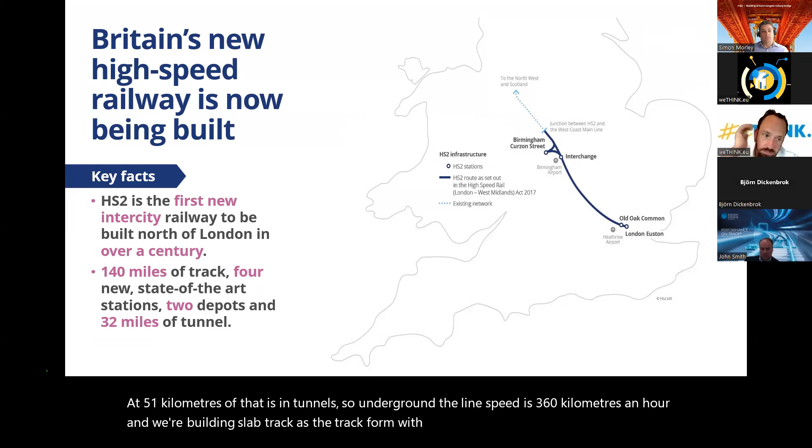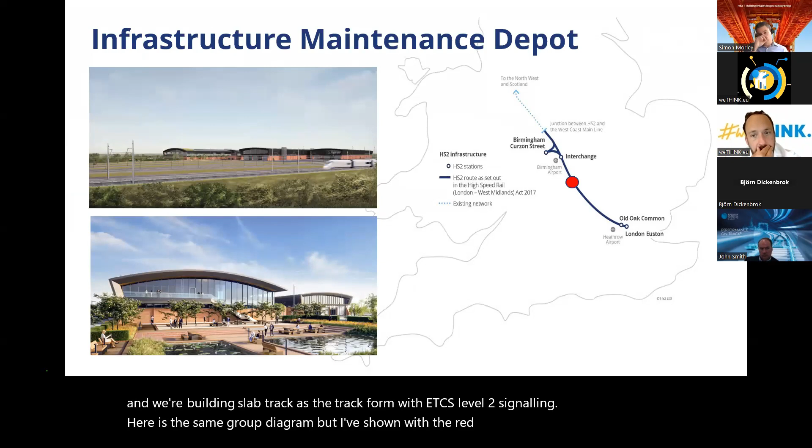Here is the same route diagram, but I've shown with the red dot where our infrastructure maintenance depot is. I've written the requirements for this depot too. The depot is designed and we're waiting for a systems contractor to build it for us. This is halfway along the route, and it's supported by smaller satellite depots to the south and the north.

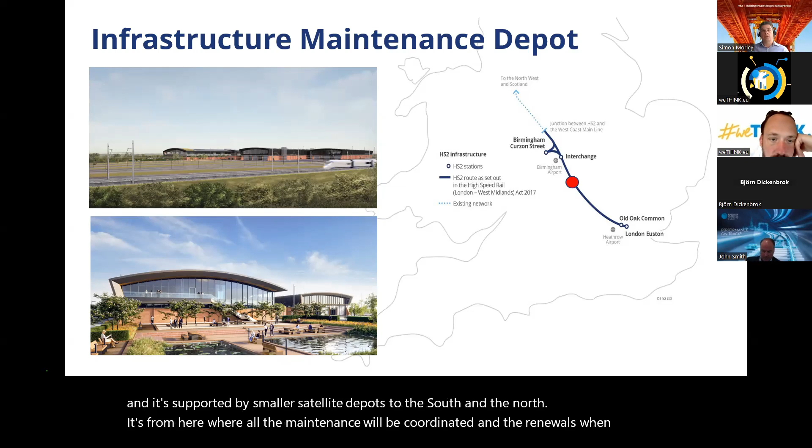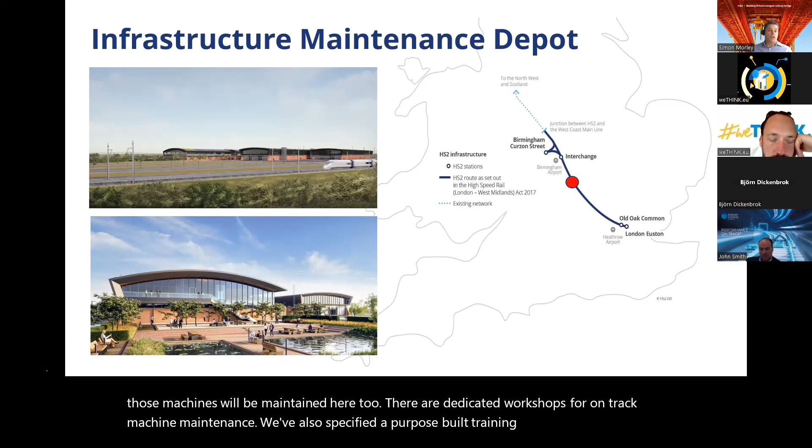It's from here where all the maintenance will be coordinated and the renewals when the time comes. On-track machines, so engineering trains, will leave and return for overnight works, and those machines will be maintained here too. There are dedicated workshops for on-track machine maintenance. We've also specified a purpose-built training facility for HS2 on this site, and there is a connection to the national network from the back of the depot too.

We have a rolling stock depot that's separate from the maintenance depot. And in the rolling stock depot, we have the control center, the dedicated HS2 route control center. It's in Birmingham, so it's at the northern end of the route. And it's here where the railway is operated from.

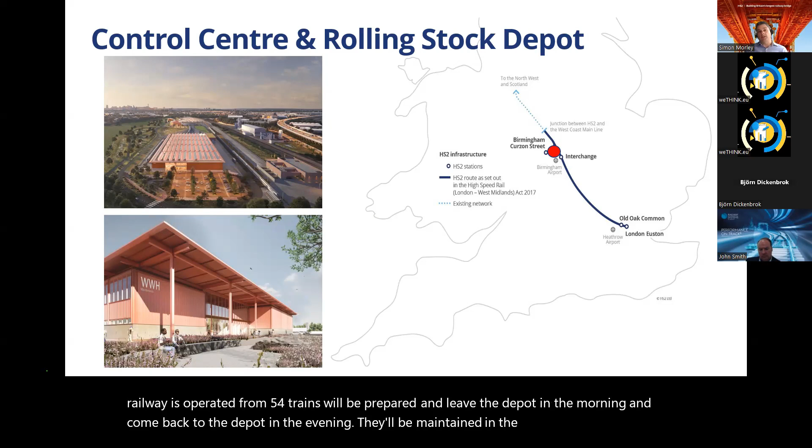54 trains will be prepared and leave the depot in the morning and come back to the depot in the evening. They'll be maintained in the shed, shown in the top picture on the left, to keep the HS2 service running with a target average delay of 30 seconds per train. That's our target delay.

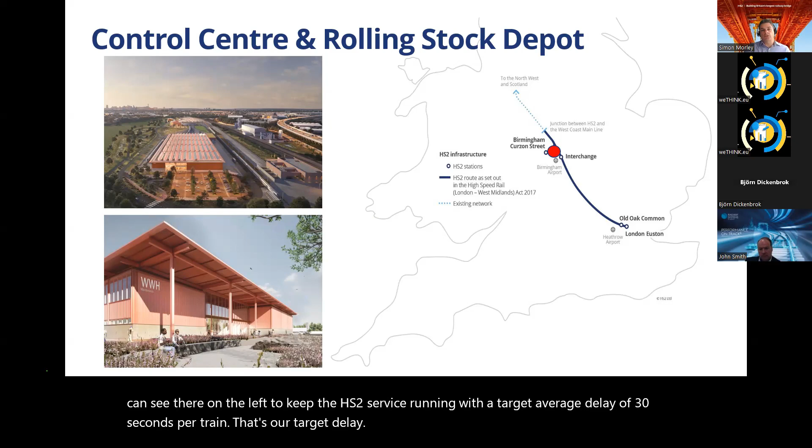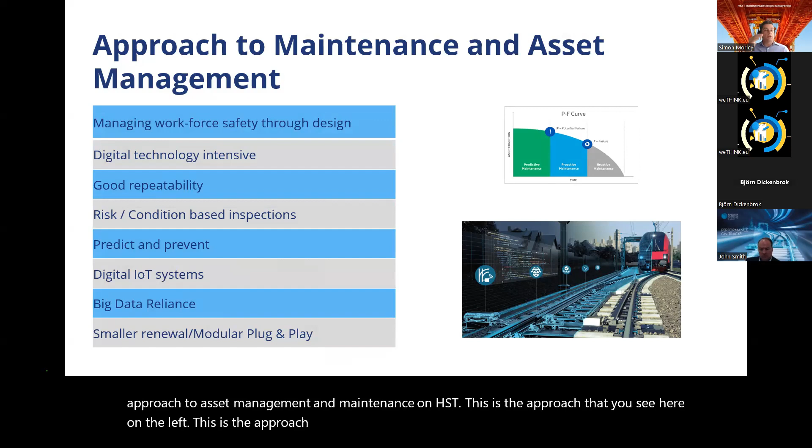So that's a bit about HS2 as a route and an infrastructure. I'm now going to describe our approach to asset management and maintenance on HS2. This is the approach you see here on the left. This is the high-level summary of how we're going to approach asset management and maintenance across all systems, civils to railway systems to stations.

But today, I want to specifically relate this approach to track and more specifically to S&C.

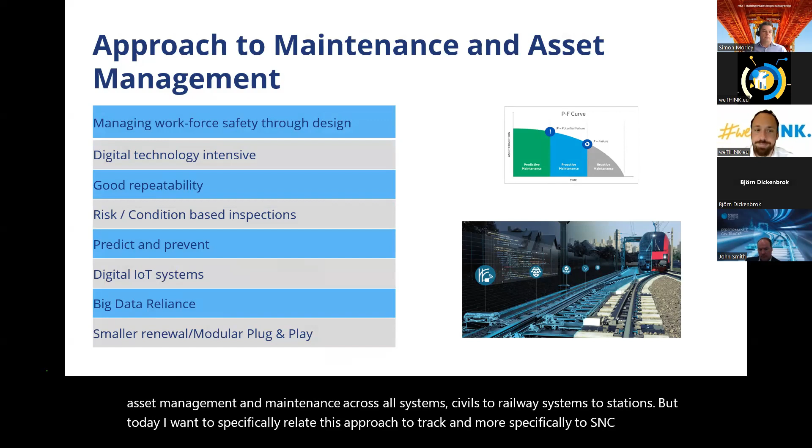So it provides a nice segue into John's presentation after mine.

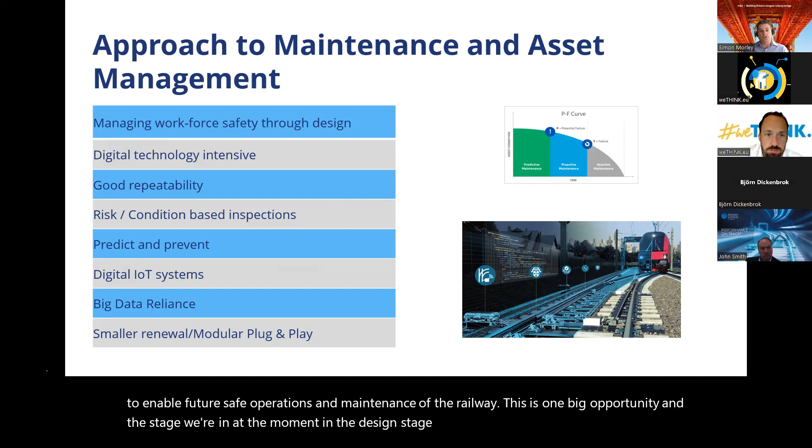We have to take the opportunity to enable future safe operations and maintenance of the railway. This is one big opportunity. And the stage we're in at the moment, in the design stage, there's no bigger opportunity to design for maintenance, so design for safety in maintenance.

At no other time in the railway's history, from this point forward, will we have such a big opportunity to make such an impact on the safety of our future workforce and our future generations that will work on the railway.

And we must think of that long term. And I see that as my obligation and our obligation to take that opportunity today. If we don't take that opportunity, we'll miss it.

So managing workforce safety through design is a massive day-to-day challenge for us. A large part of that opportunity, that design opportunity, is to create digitally enabled, integrated, and remotely monitored systems.

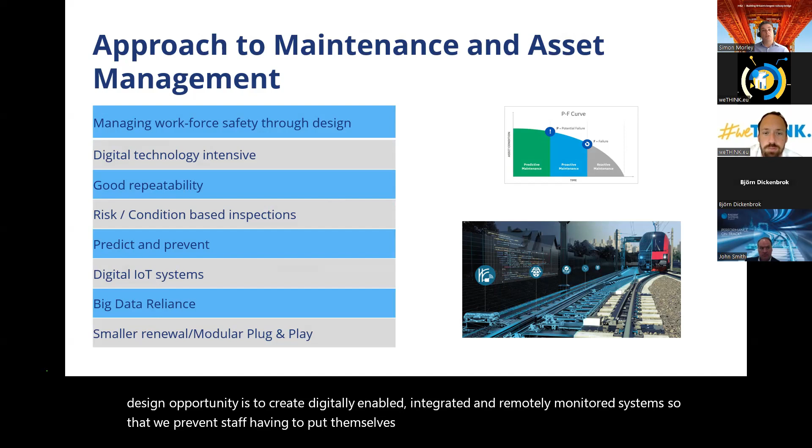So that we prevent staff having to put themselves in danger to inspect the railway. It also allows us to maintain the railway with minimal disruption, because after all, maintenance in itself is a failure mode.

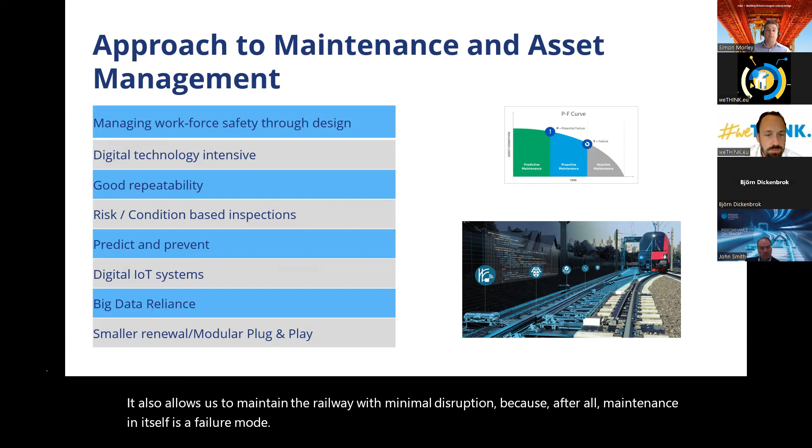Changing plans for maintenance, and changing plans in general, in the short term could themselves contribute to a higher safety risk.

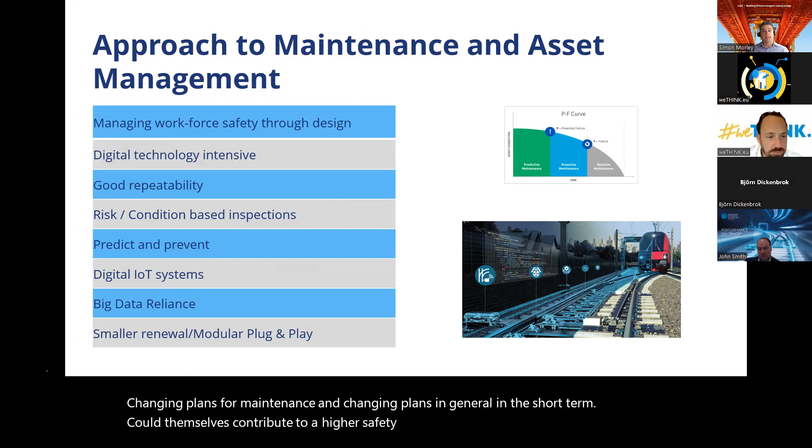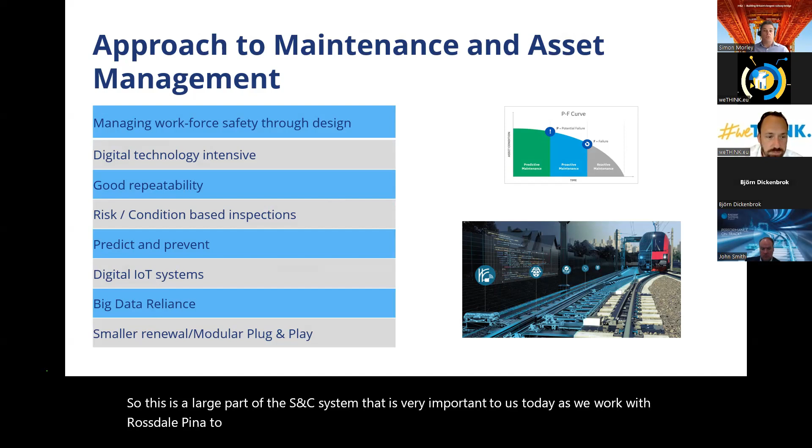So this is a large part of the S&C system that is very important to us today as we work with voestalpine to design, install, and commission the S&C. And I must say that we're successfully navigating the early stages of that contract for S&C.

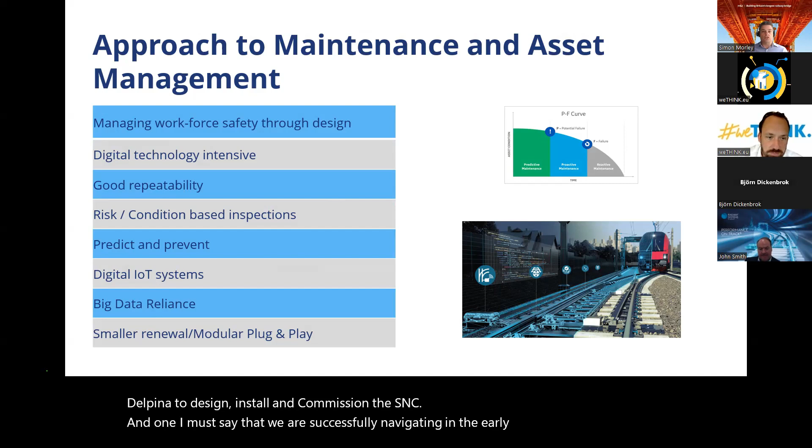8 of the 54 trains, so we get good infrastructure coverage.

The reason we do this is so that they can take measurements at slower speeds. So typical things would be ultrasonic measurements, rail head scanning, and rail profile measurements.

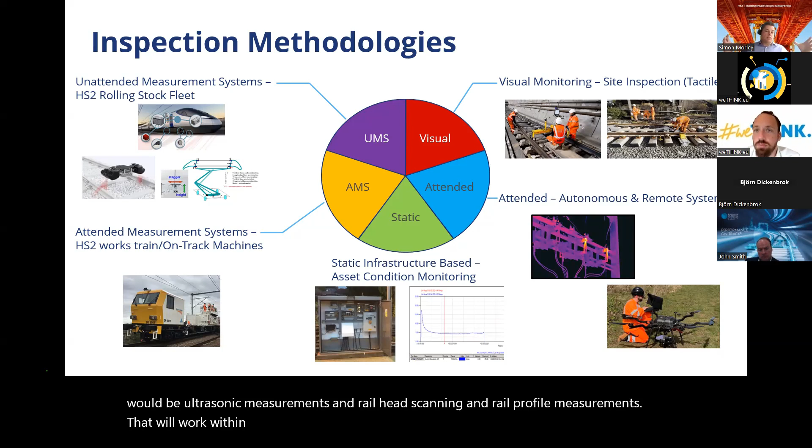They will work within the OCS mast, the overhead catenary masts. They'll work mostly inside those, assisting not just with the inspection and monitoring, but with maintenance as well.

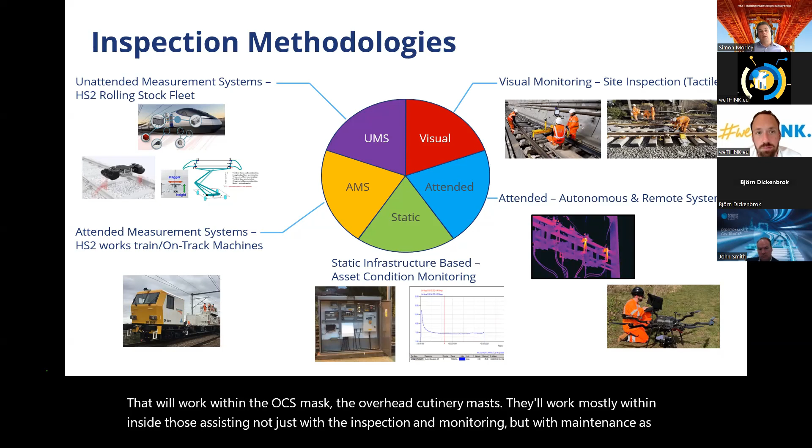At the bottom of the chart, in the green, you will see static infrastructure-based asset condition monitoring. This will largely consist of embedded sensor systems that will report asset condition and performance back to the control center.

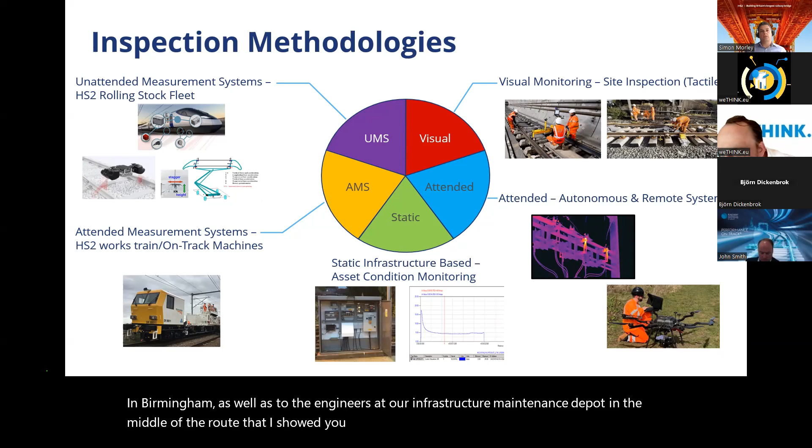In Birmingham, as well as to the engineers at our infrastructure maintenance depot in the middle of the route that I showed you earlier. And this is where the S&C system that we're building will excel, producing real-time data feedback.

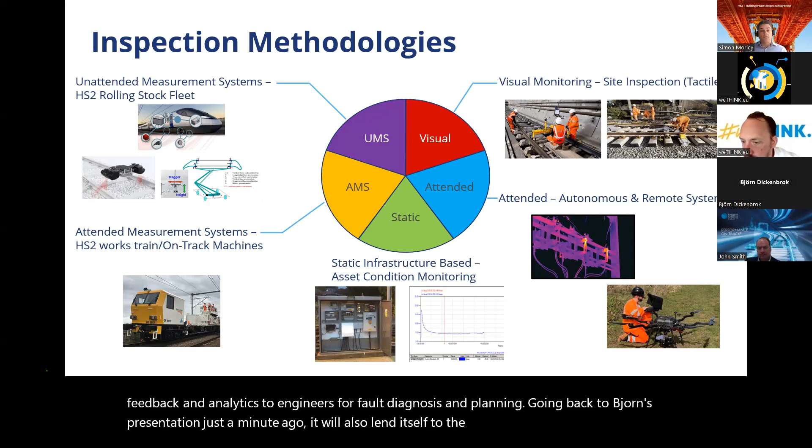And analytics to engineers for fault diagnosis and planning. Going back to Bjorn's presentation just a minute ago, it will also lend itself to the condition assessment of the infrastructure as well. And it's not just S&C, we've got this infrastructure-based monitoring elsewhere too.

Coming further back up to the right-hand side, the blue section is what I'm calling our attended, but autonomous and slightly remote monitoring around the infrastructure.

These mainly consist of unattended aerial vehicles, drones, satellites, and webcams. So it's those other systems that can help remove people from the infrastructure and be able to measure condition.

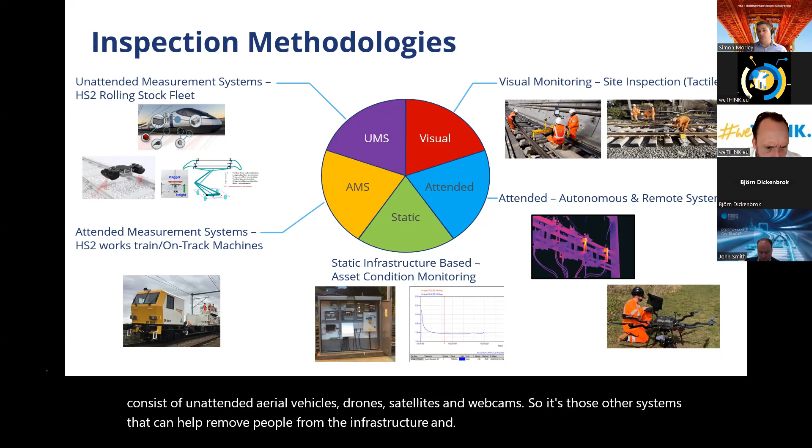In the top right, we have the good old visual inspections. These are a necessary last resort for us. We should be putting people out on the infrastructure as a last resort.

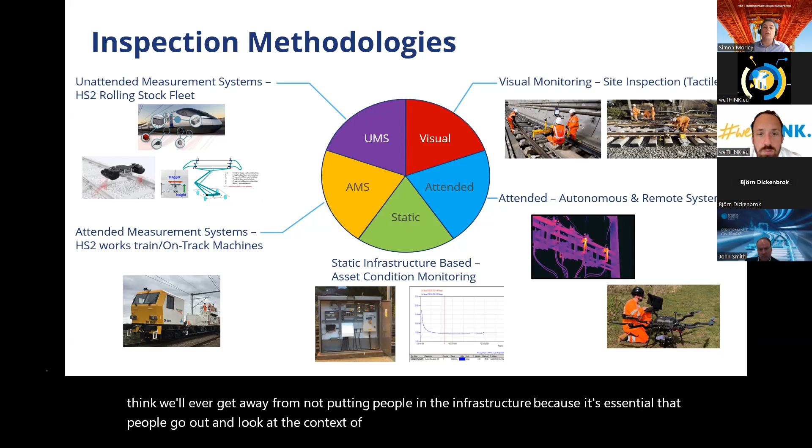For our monitoring capability, it's essential that people go out on the infrastructure, so I don't think we'll ever get away from not putting people on the infrastructure, because it's essential that people go out and look at the context of the assets and the environment they're in, and what's happening around that environment.

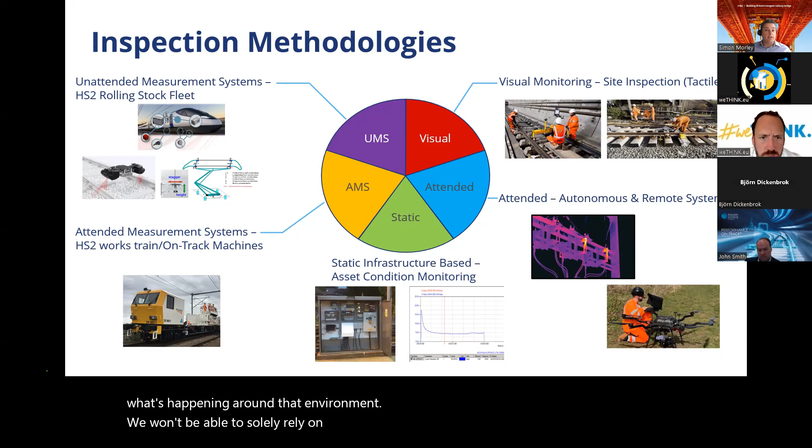We won't be able to solely rely on technology, and nor will we even want to in some respects, in some areas, but we should aim to minimize visual monitoring and people going into areas of danger wherever we can.

And that brings us all the way back to that first principle of designing for maintenance and designing for safety.

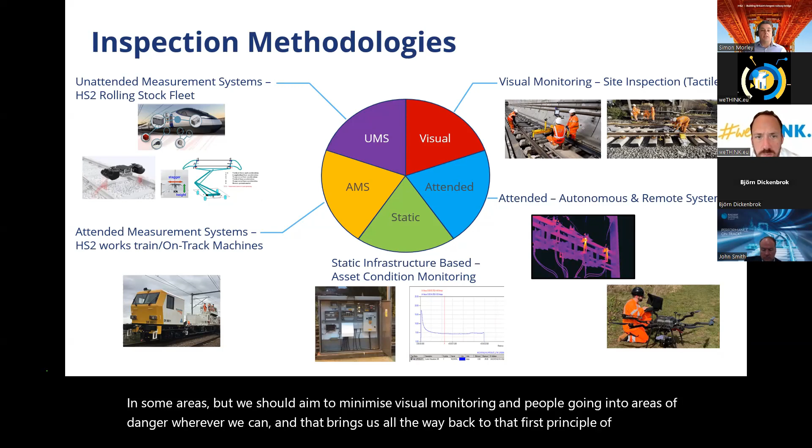These people have a dedicated room. They're called - you could relate them to the term flight engineer. So they're the day-to-day people that will be monitoring all the data coming in from the assets out in the infrastructure. These people are co-located with other operationally critical roles, such as traffic management controllers, signalers - an old phrase that we use - and infrastructure management controllers too.

They will be responsible for the continual monitoring of the railway assets through the data streams that will be fed to them continuously. So they're our flight engineers, and their job will be to identify emerging trends, conduct analytics, merging several sources of data together, not just from the assets and the physical infrastructure, but from other data that's coming in from elsewhere. It could be the public reporting faults, it could be weather data.